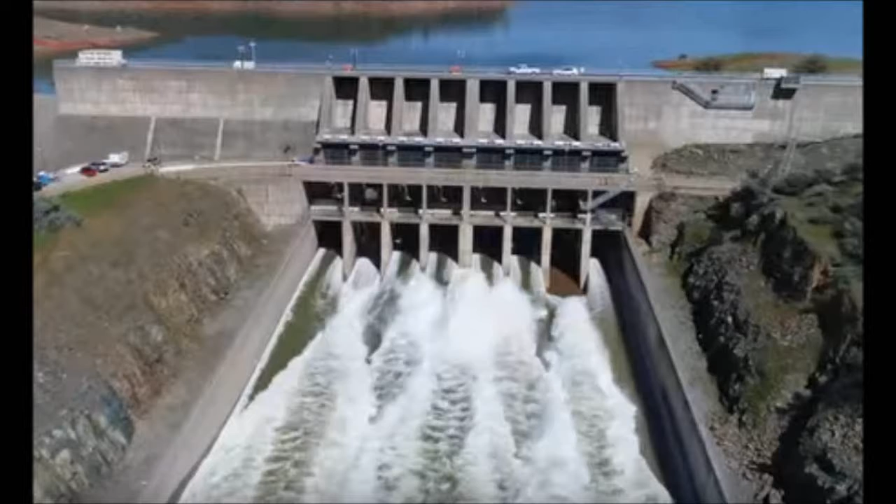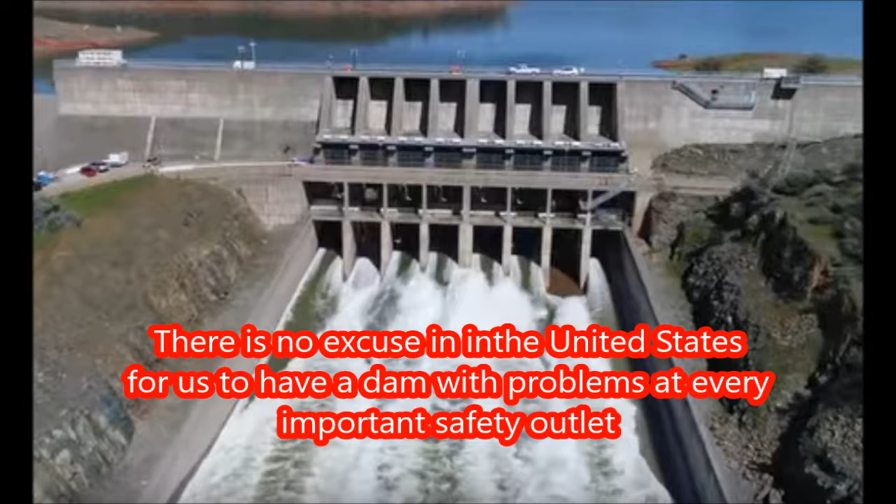The repair work at Oroville Dam has just begun. In a recent report from an independent board of consultants on the Oroville emergency recovery released this week by the California Department of Water Resources, it concluded that a very significant risk would be incurred if the gated spillway is not operational by November 1st, 2017. But it placed little faith in the possibility that it can be done, acknowledging that this is a very demanding schedule.

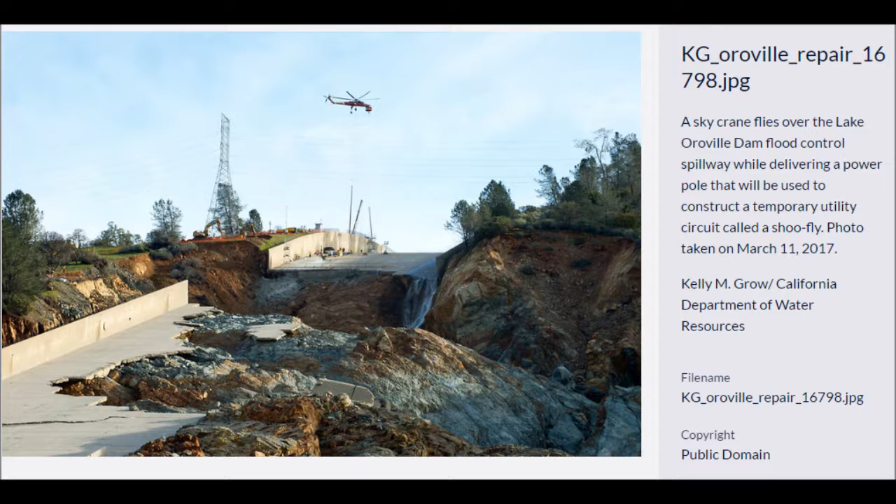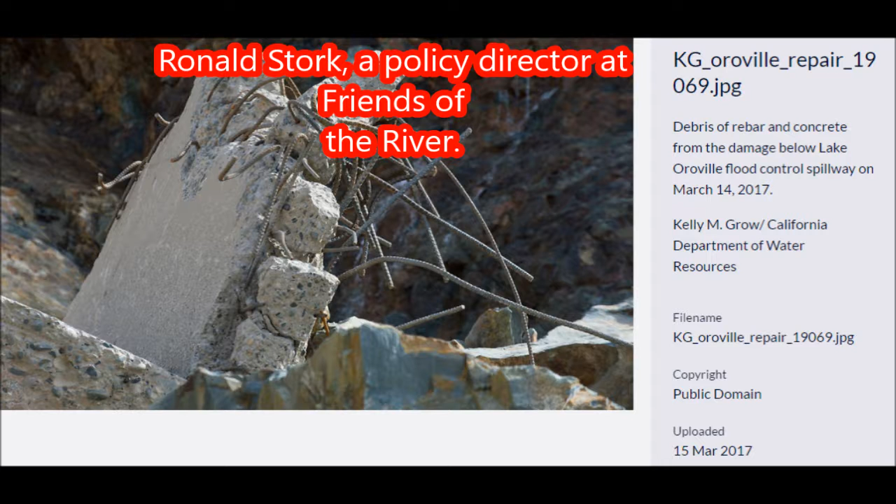To understand the implications of the report, Ronald Stork said, "If the main spillway is not returned to service before the next flood season, we'll face the same dilemma that we faced this season, that every time we use the main spillway, we are at risk of damaging it further, of throwing more material off the foundation into the afterbay, potentially cutting off the power release at the Hyatt Powerhouse," Stork said.

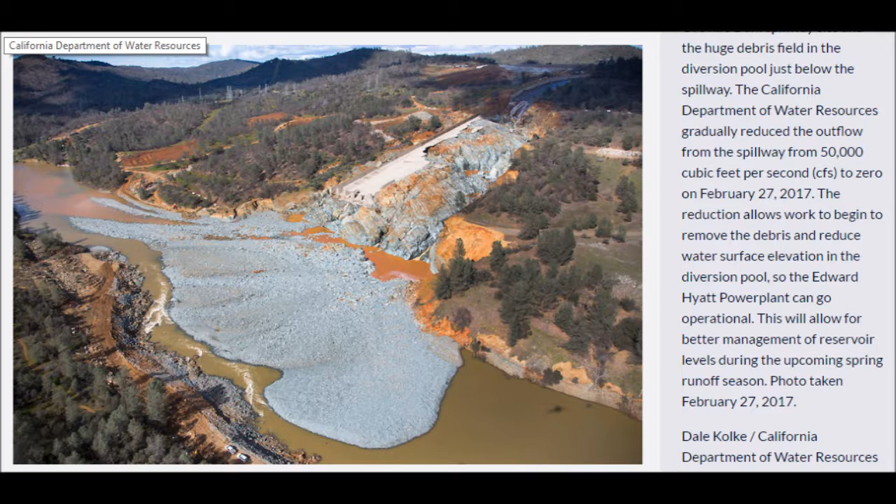He also went on to say, "I think their perspective is that they would like to have it up and running with a full construction effort running 24 hours a day, sequenced, so individual trucks are not in the way of other trucks, in this sense," he said. The conveyor belt of work aimed at building a foundation under the broken parts of the main spillway, rebuilding the broken parts of the main spillway, and that's going to take 24 hours a day efforts.

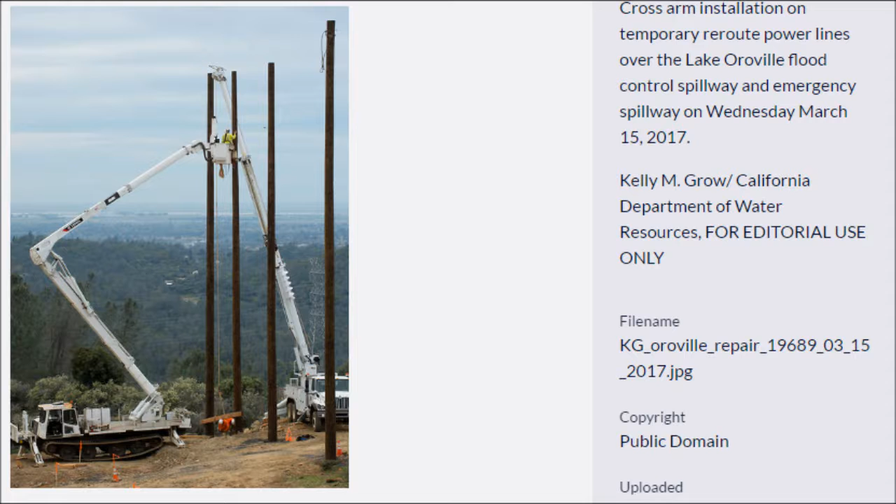No one knows what work that spillway will need, and we do not know what shape the rest of the spillway is in, closer to the top of the dam. Not only that,

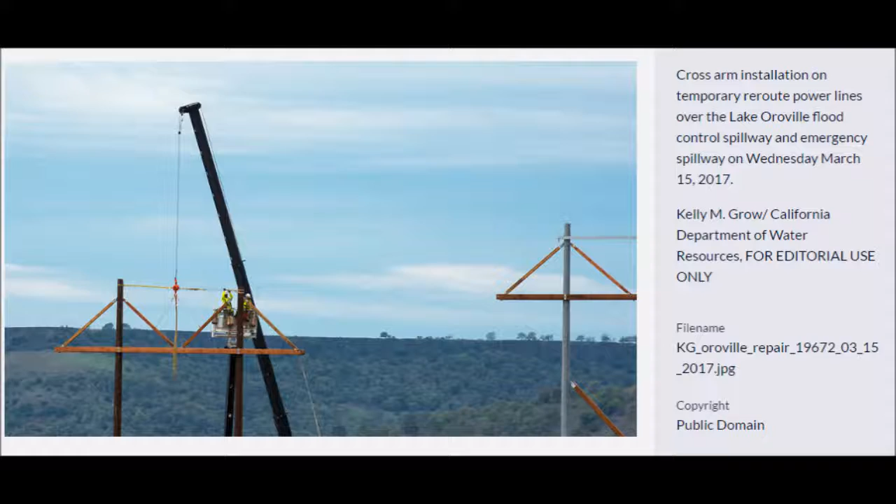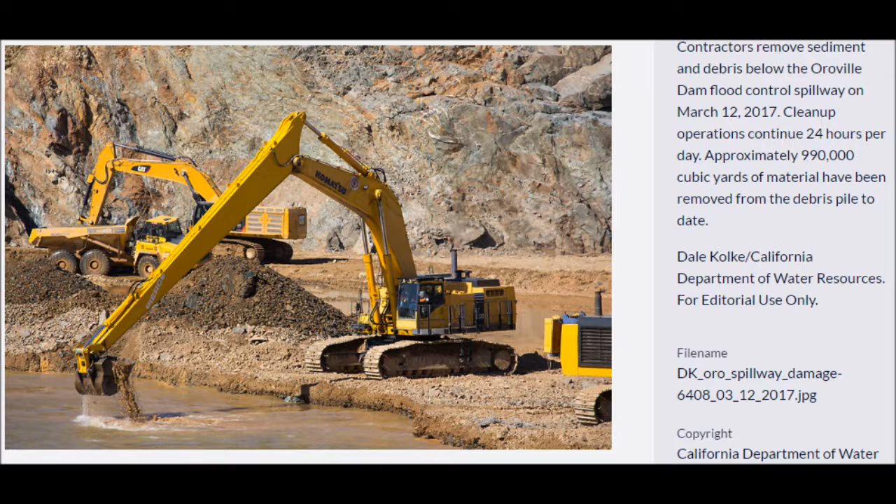asbestos has been found. A very dangerous form of asbestos has been found in the rocks that are in the spillway. Now, this is important because, first and foremost, many of the men who were working on the debris removal in the diversion pool will have been subjected to exposure to asbestos. This will have long-term health effects for them.

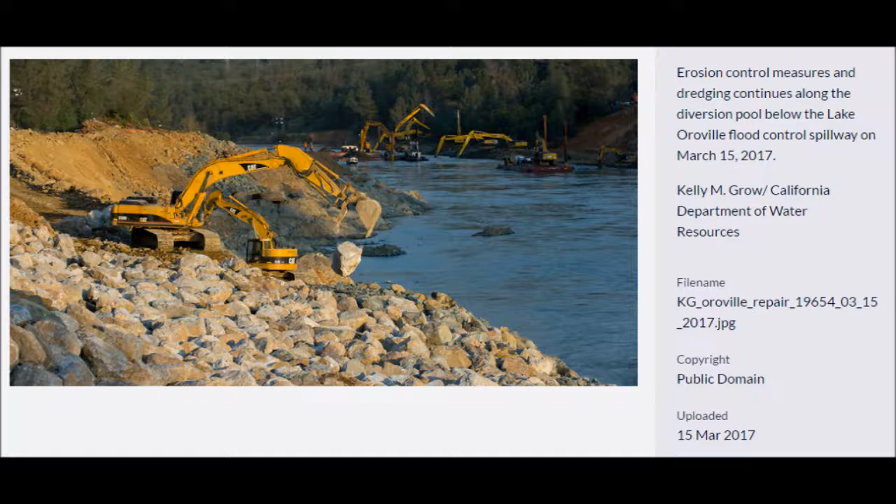Not only that, any construction worker working at this site needs to be asbestos certified, and the construction company needs to be a registered and certified construction company, certified to handle asbestos debris removal in the state of California. Any other construction company working there, any other workers there need to have these approvals. This will run the cost of repairing the spillways at Oroville Dam up astronomically.

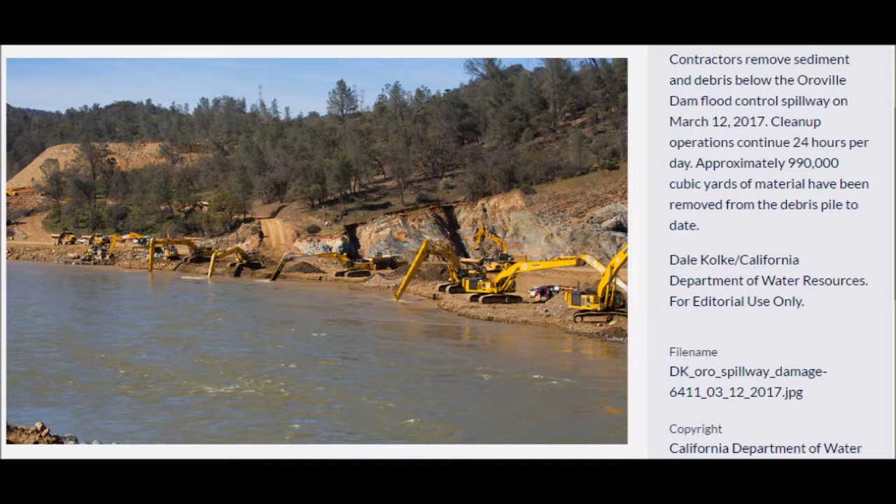The report from the Independent Board of Consultants did not even mention the word asbestos. Everyone who's ever torn down a building or worked on a property with asbestos knows that it significantly raises the cost for any kind of construction work where asbestos is present.

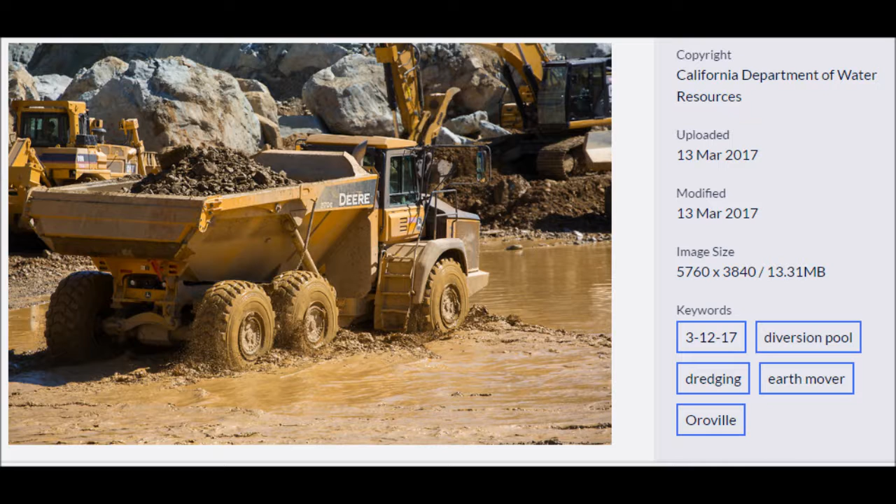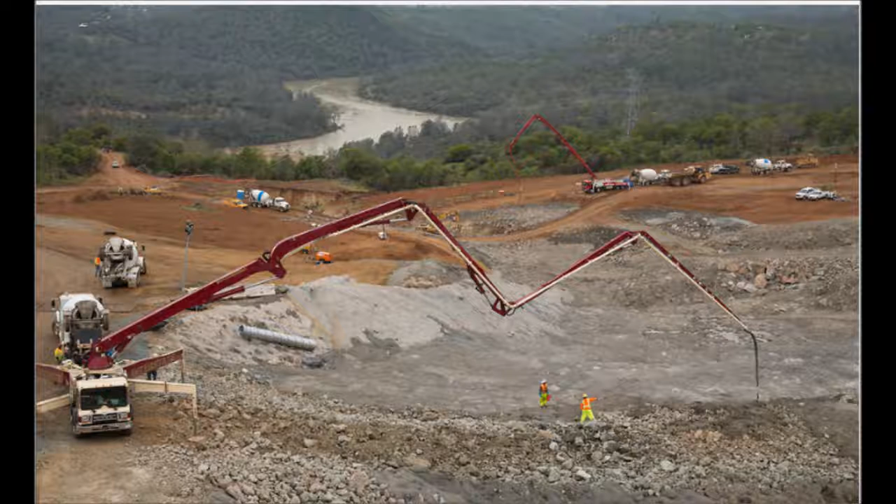I had a house one time where I had to remove a house that had no asbestos in it, but I couldn't prove it because the house had caught on fire. So I had to have the site remediated as if asbestos was present, setting up air monitoring, having water sprinklers to sprinkle the property down. When it was all over, there was no asbestos in the structure. However, it took 4 times as long to remove the material, and it also cost 3 times more than if I had just brought in a loader and scooped up the material and done the job quickly.

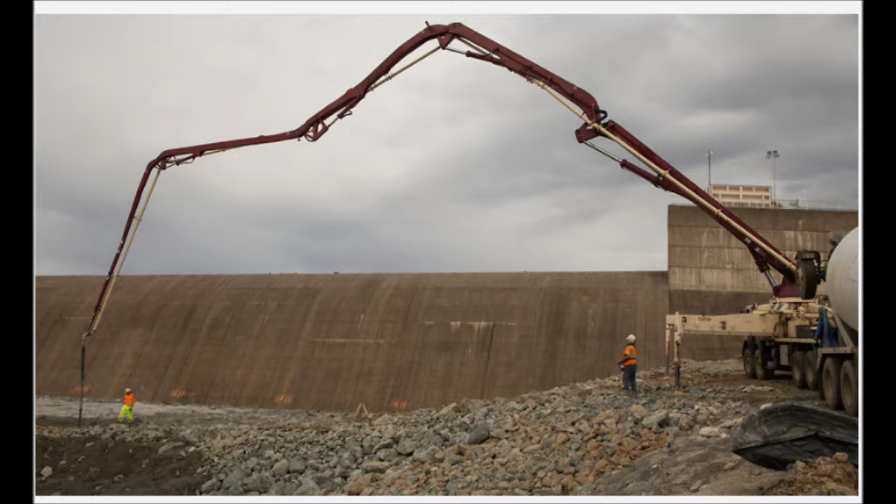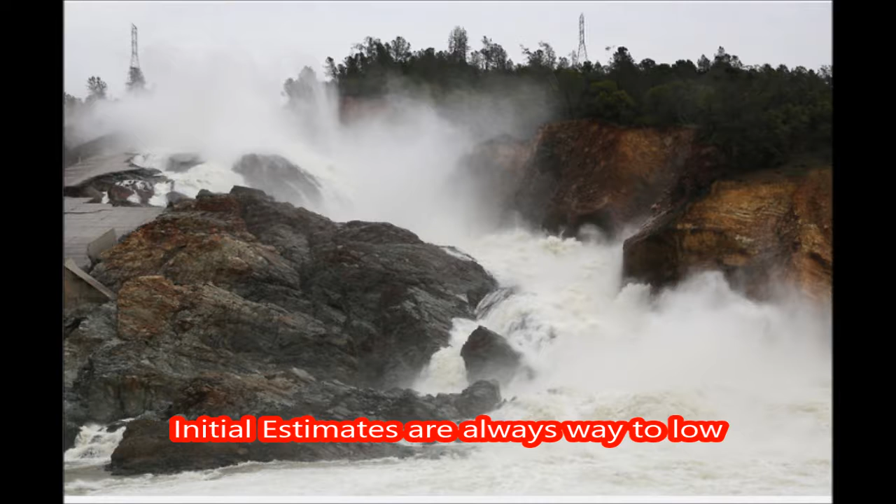So everyone who knows construction knows that when you have asbestos, it significantly and adversely affects the price of getting a job done and the timing. Therefore, I doubt that the spillway repairs can be made before November 1st. It's likely going to take many years. And if their current cost estimates are $500 million, I would say you might want to consider $2 or $3 billion for the repair costs at Oroville Dam.